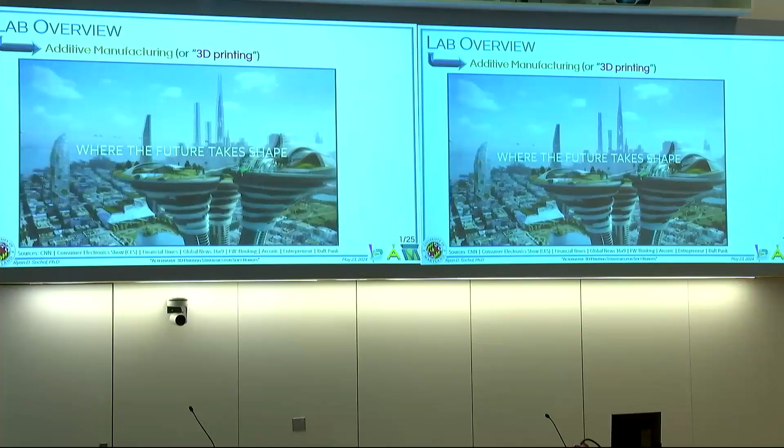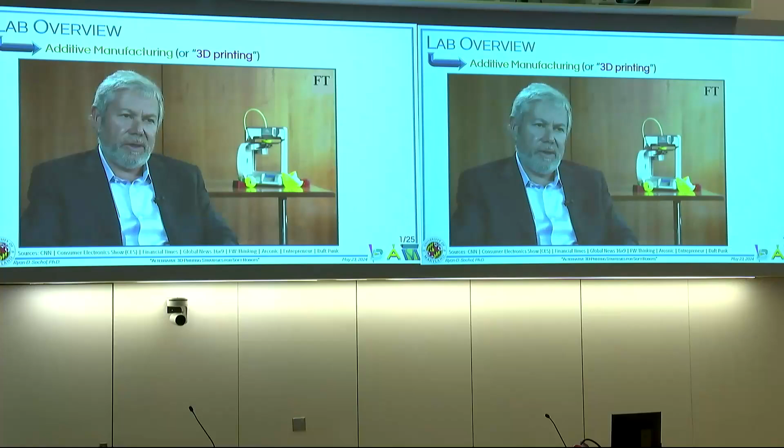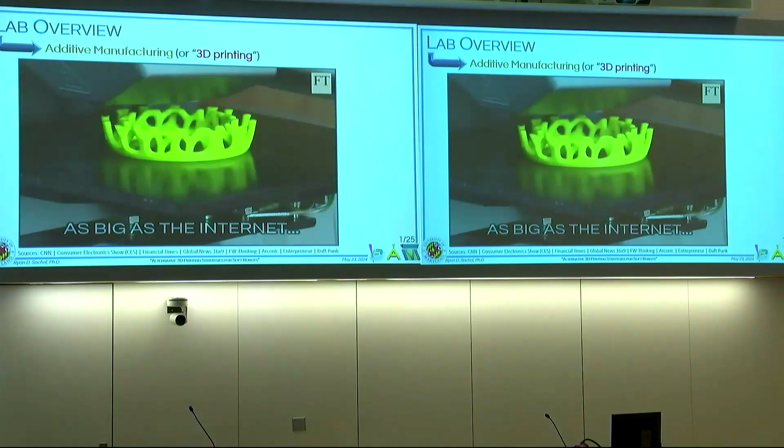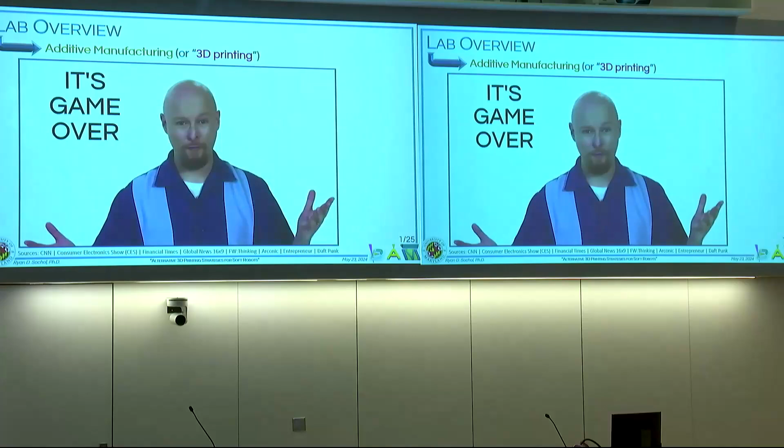At certain science fiction depictions of what the future is going to look like with 3D printing, all of a sudden these things become reality. It's all possible. It's the world of 3D printing, and it's going to change everything. As big as the steam engine was in its day, we're talking limitless customization, as big as the computer was in its day, as big as the internet was in its day. Printer in every person's home 3 years down the line or 5 years down. Common in people's homes as the toaster oven. You print one printer that prints another printer, and it's game over. So what would you build if you could create anything? Print any object you can imagine and have it in your hands in just a matter of hours. It's going to change everything.

All right. So I see some of you are very polite and you've held in your smiles, which you don't need to do here with me. I saw some over here could not hold it in. I don't mind that. This is ridiculous stuff, right?

Anyone know why these people are saying stuff like this? I'll give you a hint. It's because they want you to invest in their companies. So the one person who was saying, oh, it's bigger than the internet was in its day, which makes no sense, I thought the internet was still in its day. But he was the CEO of 3D Systems. These were taken back around the 2010 to 2012 time point.

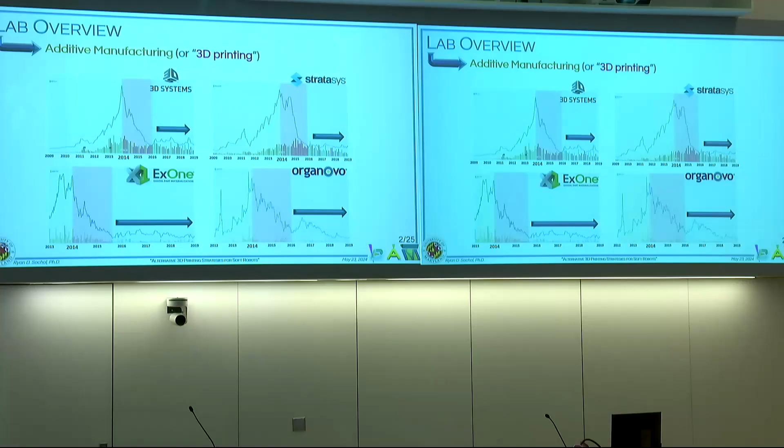And what you'll see is that a lot of this bullshit kind of worked, right? So people threw their money down, they invested in these 3D printing stocks, but at some point publicly traded companies have to release their revenues, their profits, and so forth. And we had this kind of wild crash that happened around 2014 for 3D printing companies, and it really kind of never recovered. And so some people will say, Doc Sochol, this happened a long time ago. We've learned our lesson. And I will say, no, we did not.

So Desktop Metal is another one. This came to market a couple years ago. Everyone said, oh, Desktop Metal, it's got these people from MIT, da da da. Everyone threw their money down, stock went up over 30. I sounded like a crazy person because I was telling everyone I could, like, what is happening? I don't understand. Finally, the world was right.

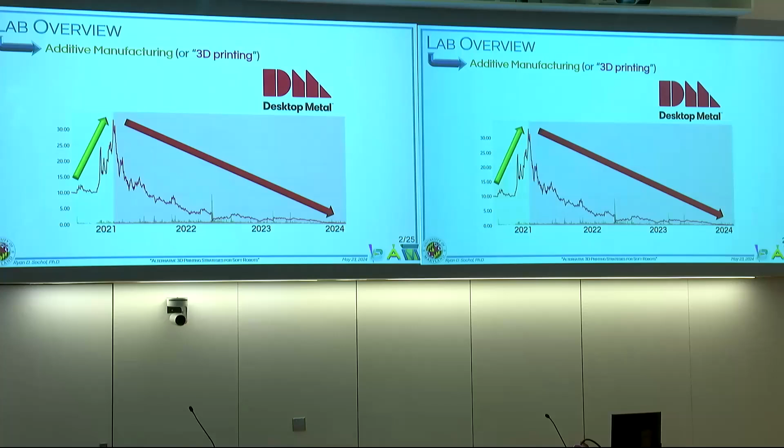Their stock crashed, and it's not just that it hasn't recovered. This particular company actually has been threatened with being delisted from the New York Stock Exchange because their stock has been under $1 for so long, which I hope comes to fruition. It will be vindication for me. I spent a good 6 months of my life thinking there was something wrong with the world.

Anyways, so what is the reason for this? I think this comes down to people not understanding what types of applications demand the use of 3D printing and which ones really make no sense to use 3D printing. So there are two general rules of thumb that we use in my lab. One is in terms of the number of parts that one is making.

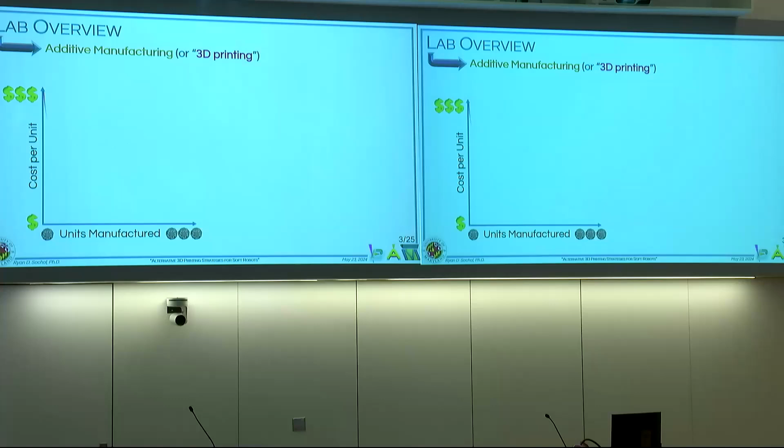So the benefit of conventional methods of manufacturing is that normally the more that you make of something, if you make 20,000, or let's say 20 million of something, that's going to be a whole lot less than just making 2 of something in terms of cost per part. But additive doesn't really have these kind of benefits of scale. Overall, the general costs should have a similar structure where you're just paying for materials, time, and so forth. And so basically, there's this volume break even, which is if you're making a lot of something, use conventional, right?

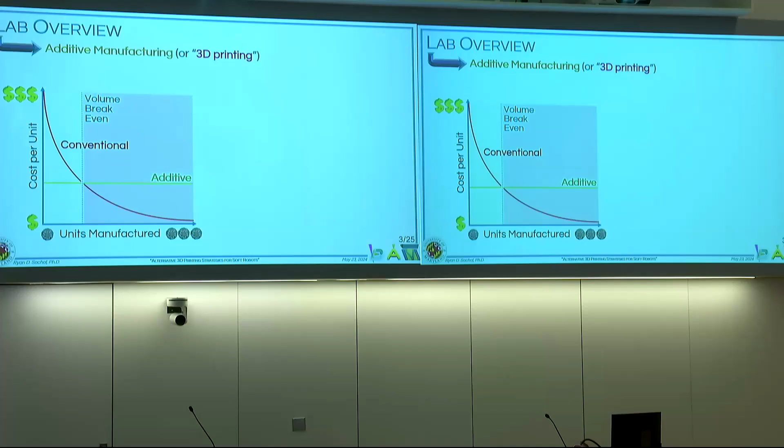If you hear someone talking about, we're going to make 100 million parts with this additive technology, I want you to put on your critical thinking cap and say, Dr. Sochol doesn't agree with that, and he's going to be mad. All right. But if you're saying I only need a few of these, that's when additive starts to really make sense, right? That's why it got into rapid prototyping. If you're looking for a killer app to talk about with your friends at a cool party, I would say Invisalign is a really great example.

So this is a use case where basically your mouth is different from my mouth. And if I'm using Invisalign, in theory, my mouth should be changing month to month to month. And so this is where you need a lot of customizations, a lot of single parts. And this has been a very successful company.

I would say aerospace is probably another opportunity where maybe you're only making a handful of rockets. You're not making tens of millions of the same rocket. At least we aren't yet. And so that's another kind of killer app of 3D printing.

But the one that I'm more interested in is something that's a little bit more qualitative or abstract, which is design or geometric complexity. Typically, the more complex a part design is, and I know that that is a subjective term, the more it's going to cost to make it using conventional means. But with additive, really, you shouldn't have anything like that. Again, it just comes down to the materials and the time on the machine. So it should stay relatively the same.

And so here we have what I'm referring to as complexity break even. Basically, if you have simple parts, and again, simple is very loose, that's a case where it makes sense to use conventional methods. But the more sophisticated something is, those are cases that really demand additive.

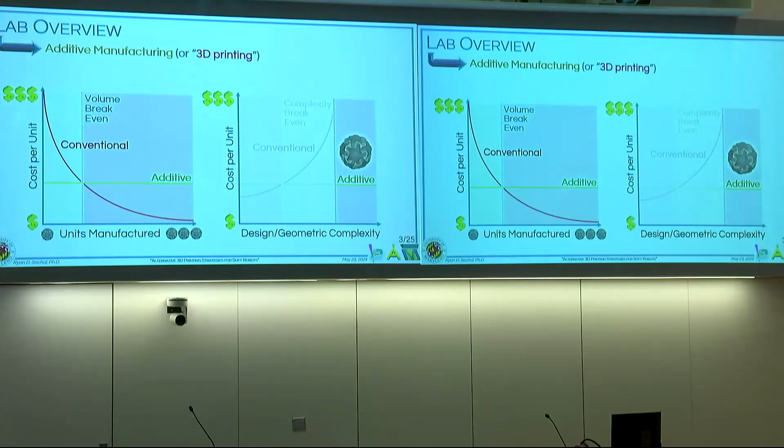And for me in particular, I'm excited about things that you really cannot make using conventional means. That's this regime over here where there just is no way that I know of to manufacture certain types of components. And so that's where our lab typically operates.

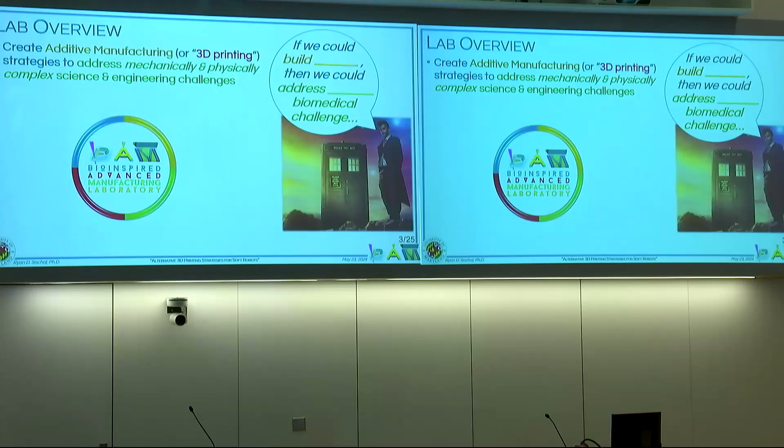I would say that most of the projects we have look something like this, where some doctor comes to us and says, hey, if only we could build blank, then we'd be able to solve some type of biomedical challenge. And so that's led us to do work in a number of different areas. Obviously, today it's a robotics discussion, so we're going to focus on our work in soft robotics.

All right, so there's been a little bit of this from the first talk. Thank you for getting into this. All right, so hopefully I don't have to convince you on my own.

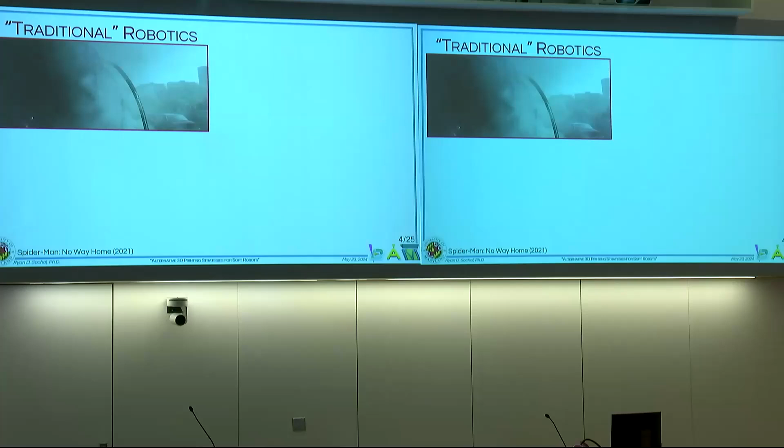Traditional robotics looks something like this, where basically you have these rigid-bodied systems. Often these are controlled using what I would refer to as electronic means. There are other cases, but I think that's the typical standard. But recently, there's been a lot of interest in what's referred to as soft robotics. In these cases, you have soft-bodied systems, and one of the ways that these are actuated is using fluidic means.

Now, when I watched this particular scene from Spider-Man, I thought it was really cool. And I think it does highlight some of the benefits in terms of the ability to adapt in geometry. But I turned to my wife and I was like, this is a terrible use case. And that's because there's actually an intrinsic safety to soft robotic systems. So if you're trying to use a soft robotic actuator to hurt someone, I would say that's a really dumb idea.

So my wife left me and, no, things are fine. And so anyways, all right.

So there's been a lot of interest in the potential of trying to get away from a lot of off-chip controls to getting more onboard intelligence with these kinds of systems. I think our first talk already showed that issue where you have the tubing coming out of these robots.

This particular paper was how I got into the field. It came out back in 2016. It was a seminal work. I think it totally deserved to be in Nature. This was a big one. The thing that I thought was really cool about this is that they took a microfluidic chip and embedded it inside of this Octobot to basically control what's happening in the robot.

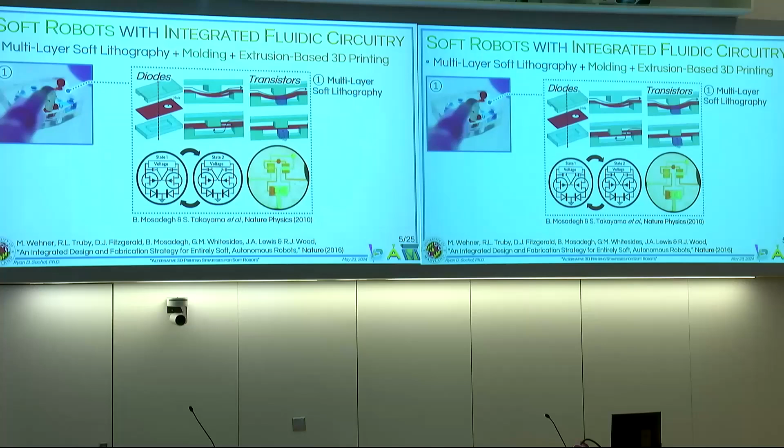So first you start with multi-layer soft lithography. I don't know if any of you have done that kind of stuff in the clean room before. Me, I hate it. I'm not a fan. So they use it. It's actually even a more sophisticated version of that because you have to punch holes in the membrane and align the membrane and so forth.

Anyway, so they take this process, then they put them inside of these CNC'd molds. They actually also have a kind of softer material in there already. And so they're actually doing a double casting process where they have another silicone mixture that they're adding. They're doing degassing, all that kind of stuff. And then they're actually using 3D printing in this case for a pretty interesting concept.

And so what they're doing here, let's see if this can click. There we go. So basically, they are printing a sacrificial material. And they're using this in order to connect that circuit to the different arms, they're patterning bladders and all that. And then actually to get it to come out, you have to wait roughly 5 days for it to evaporate out of this device. So this is a pretty rough process.

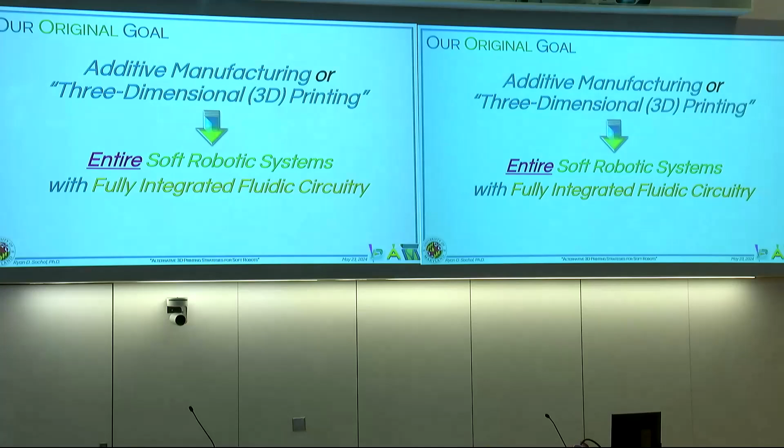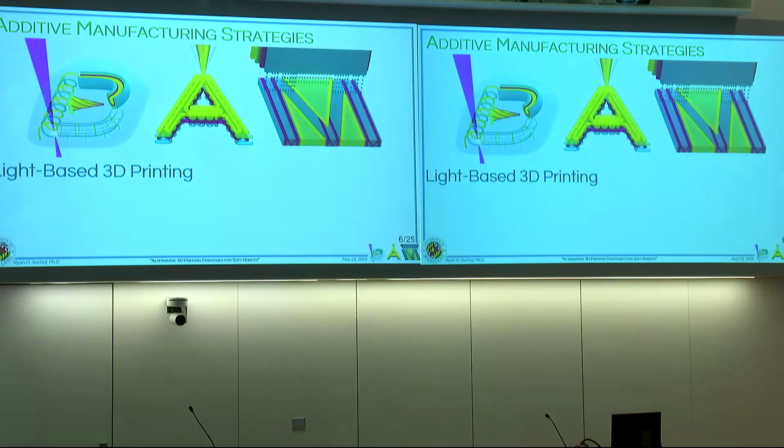And so our original goal was basically, can we use additive manufacturing or 3D printing to print entire soft robots with fully integrated fluidic circuitry in a single print run? So there are a couple options for that. This is my lab's logo. It's meant to represent the 3 most suitable approaches for this type of application. There are light-based 3D printing techniques, extrusion-based 3D printing techniques, and then also inkjet approaches.

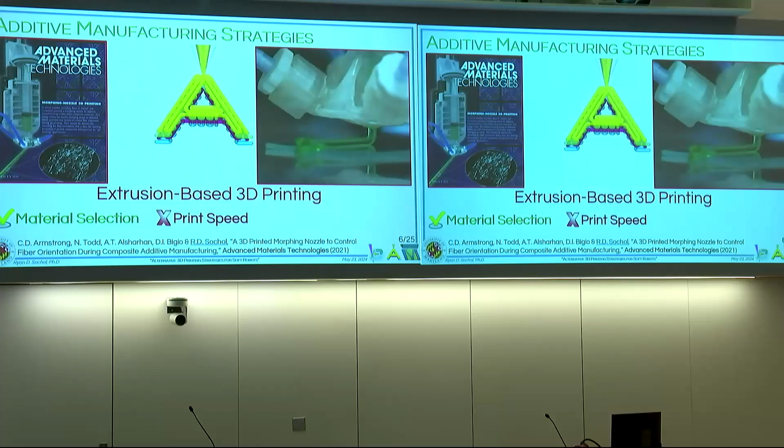I think most people, when they hear 3D printing, are probably thinking about something like this. And indeed, this is something that my lab has done a little bit of work in. I would say the major benefit is material selection. Of everything I'm talking about today, it's not even comparable. If you want material versatility, this is your approach, hands down. For me, the benefits kind of stop there. This is easily the slowest approach that we've ever used in my lab, by far. And also, especially at smaller scales, there's a limit in terms of geometric versatility, the types of designs that you can build, because the nozzle has to physically be there point by point to put down material.

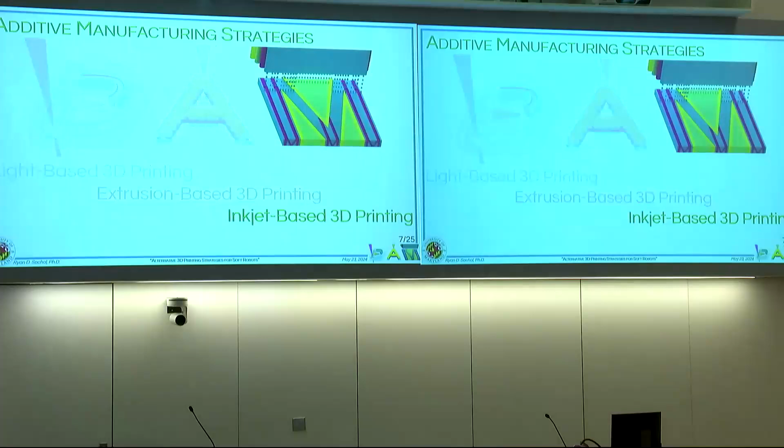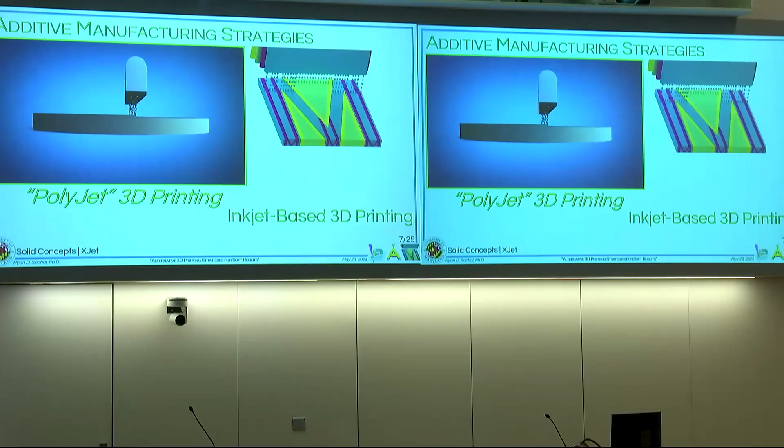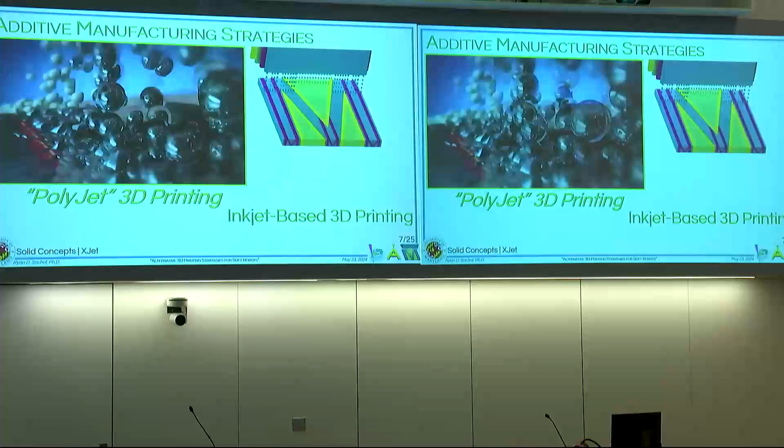And so another option is what's referred to as material jetting. In our case, we're using PolyJet 3D printing, which is a trademark term. This works a lot like a color printer, where instead of printing just one page, we're printing page on top of page. And just like a color printer where you can combine different colors, here you can combine different materials. So you can have hard materials and soft materials. You can also have support materials that help the part to build. But after you're done, you can dissolve those materials away and be left with your final part.

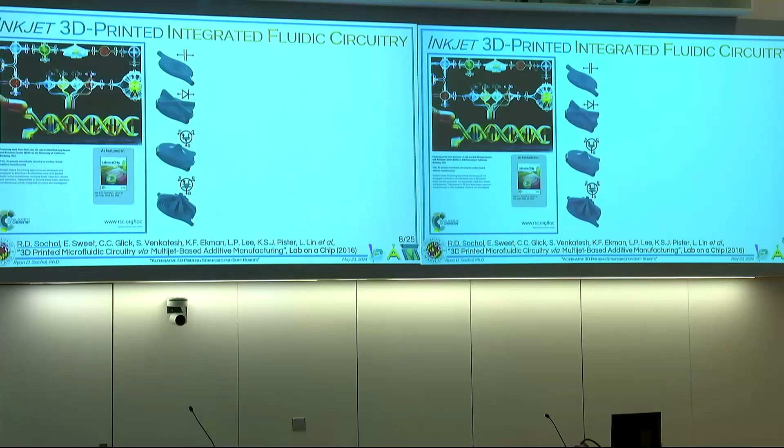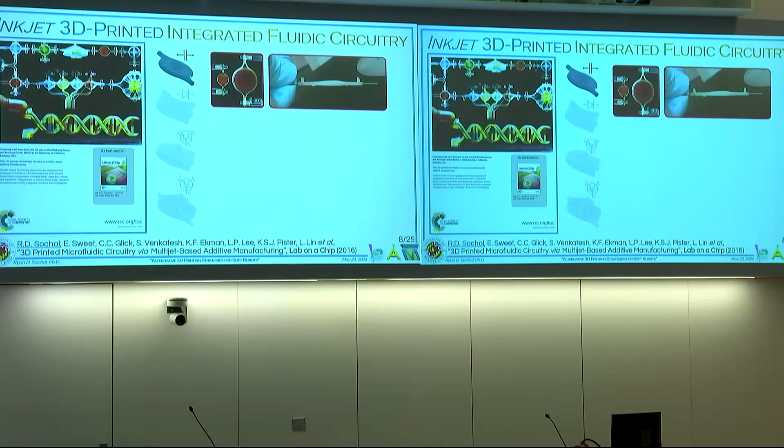As a postdoc, I'd actually applied this technique, and we had demonstrated a number of different types of fluidic circuit elements. There are fluidic capacitors, which are basically like balloons that inflate. There are fluidic diodes, which are kind of like check valves, where just one single direction is allowed, but the reverse direction is not. And then we have what we're loosely calling fluidic transistors, but these are really biased in the triode region. So don't think you're going to get any saturation behavior.

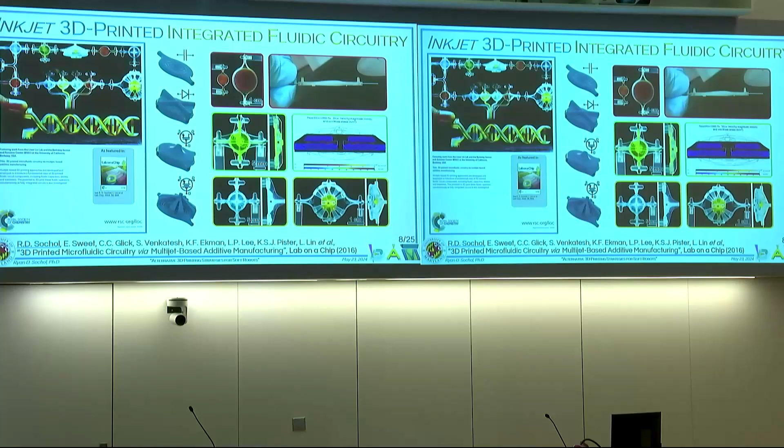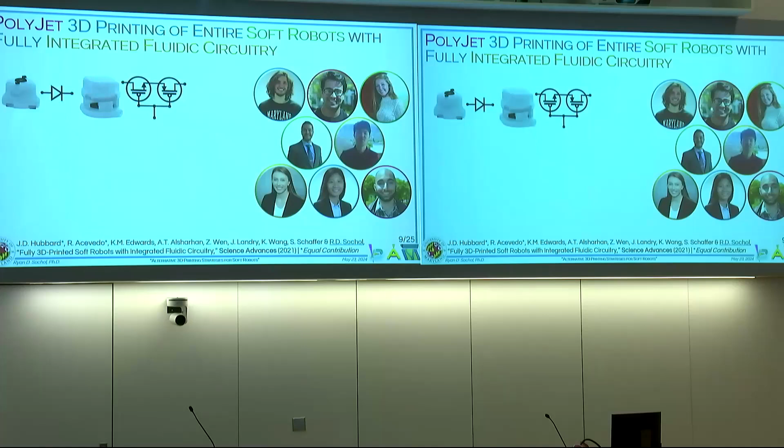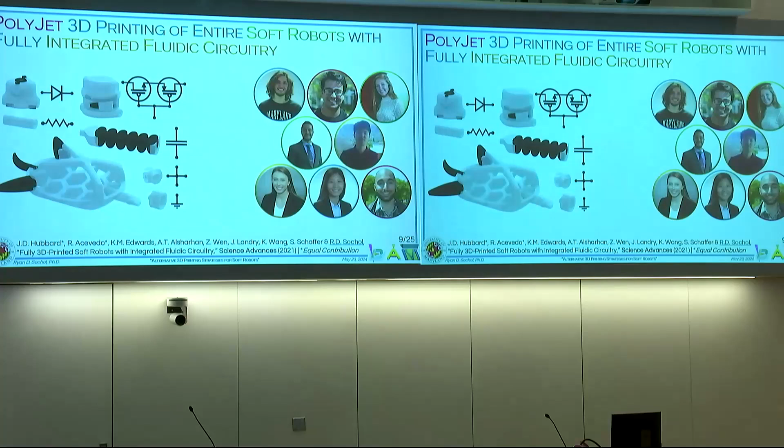And so this is something that a number of students from my group ended up trying to put together. The idea they came up with was, we're going to take designs for fluidic diodes, fluidic transistors, fluidic resistors, which you typically don't want, but that's just a channel. We have the actuators behave like fluidic capacitors. We have different types of joining elements, and then the body features. Then you combine these all inside of your CAD software. For us, we're using SolidWorks. We put it all together. You send the STL file that has that fluidic circuit inside over to the printer.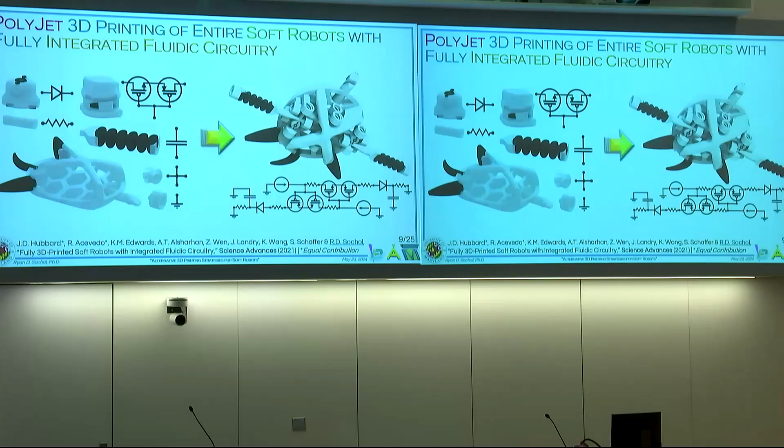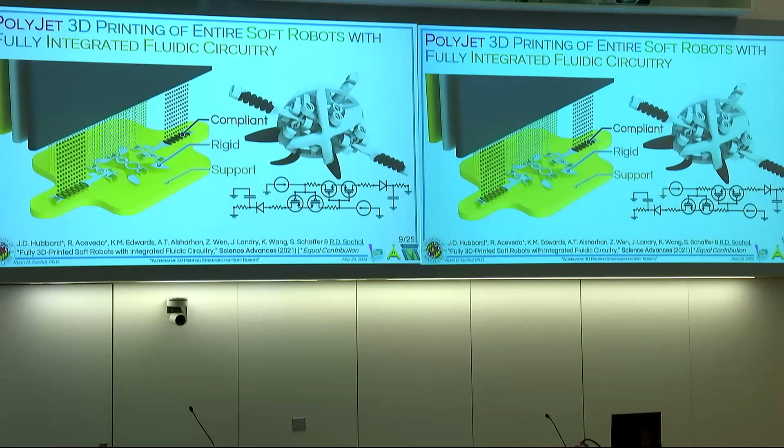And then there we go. It's going to print it. And again, you can have compliant materials that are connected to rigid materials. Then you have that sacrificial support material. And so this is what the process looks like. If you want, you can go see this printer. It's on the second floor, right behind us.

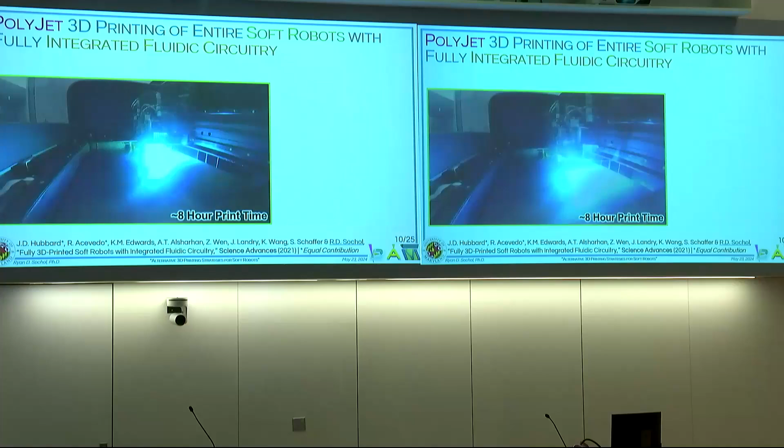Basically, for the printing process, the thing to note is the taller something is, the more time. So this was pretty tall because I thought it'd be cute to have this big shell, but that shell ended up adding a ton of time to our printing process. But it looked cool, and I was trying to make it look like Testudo. I did it. I'm a terrible artist.

Anyways, so you can dissolve the support material, and then basically in less than 24 hours from pressing print upstairs, you actually have this, and there's roughly 1 hour of manual labor that's needed to remove that support material. You're left with a soft robot that's ready to use.

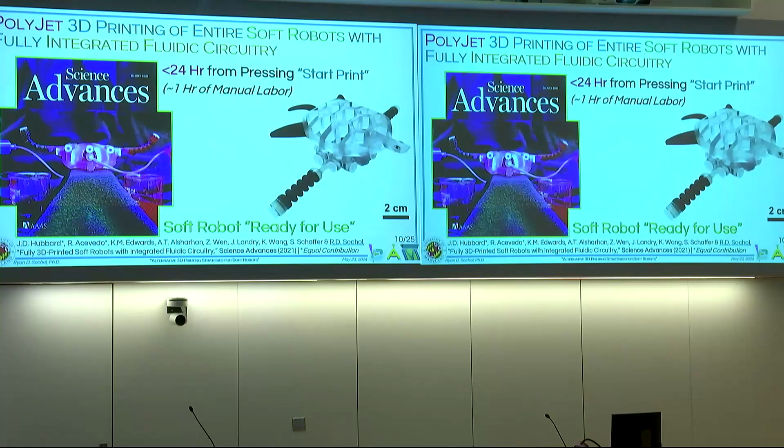And so there was another demo that we did here that was kind of fun. I can't go into too much detail in terms of time, but basically the idea is that we had fluidic transistors that activate at different pressures. And so you can basically control these 4 different states using just 2 different pressures, and only one of those pressures is going to be regulated.

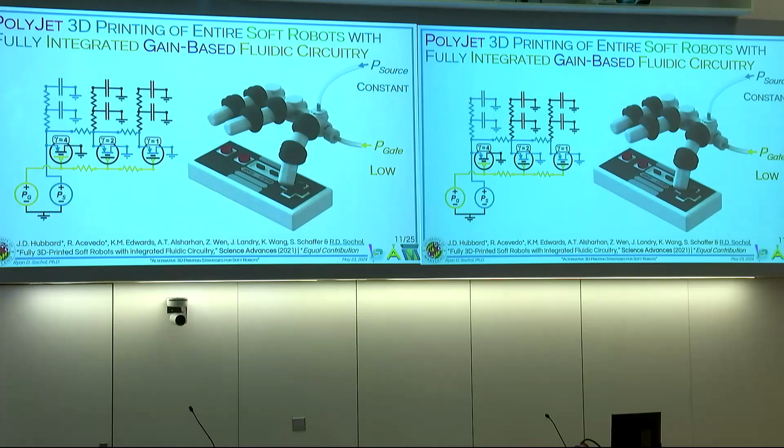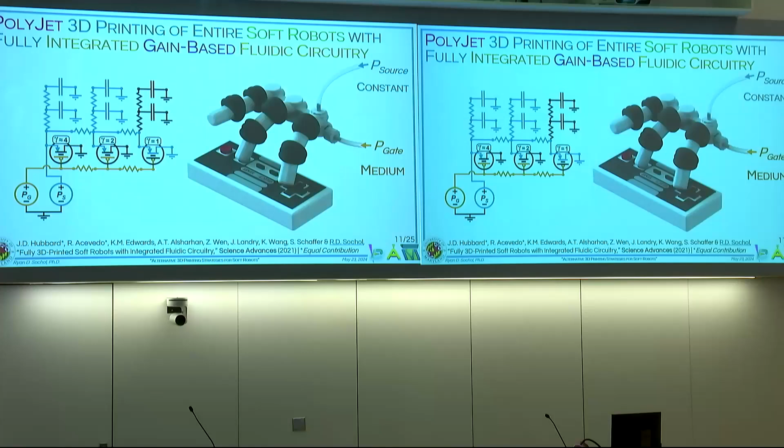So the way it works is that initially, if the gate pressure is off and there's a constant source pressure, nothing happens. But if you increase the gate pressure to a low pressure, it's enough to activate that first transistor, but not the other one. So the finger's pressed down. If you're playing Super Mario, he walks forward. If you increase it a little bit further, that's enough to get that second one to come down. Now he starts running. And then if you hit a high pressure, Mario will jump.

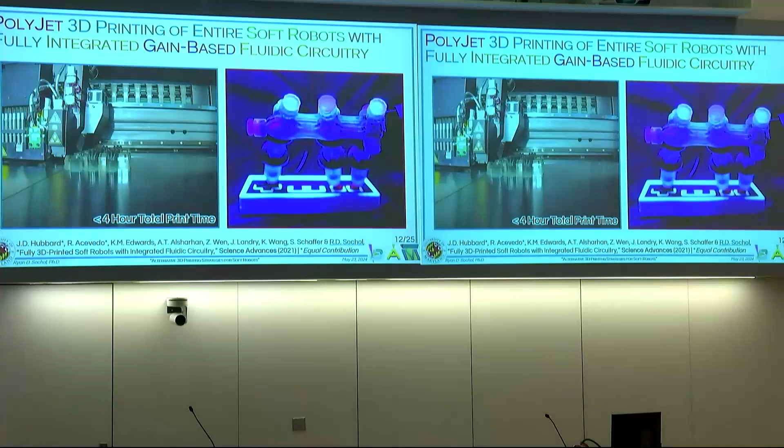So again, the height is really what changes how much time it's going to take to print. I'm loosely saying less than 4 hours. Really, it's about 3 hours, but writing 3.1 hours looks ridiculous. And so this was pretty fast and post-processing was fine. And then you can take some cool pictures with black light if you're a dork like me.

So this is the setup that we have. Basically, we have our source pressure that's coming in. Again, that's programmed to be constant, and this is all pre-programmed. Then we have a gate pressure, and that's going to be regulated from off to low to medium to high, depending on what we want Mario to do. And then that's going to activate this particular controller to control what happens to Mario.

And so I've presented this before. There's some fun music. If you really want to watch the whole thing, go watch it on my YouTube channel or something like that. But I think just here, it's just fun to show the example demonstration.

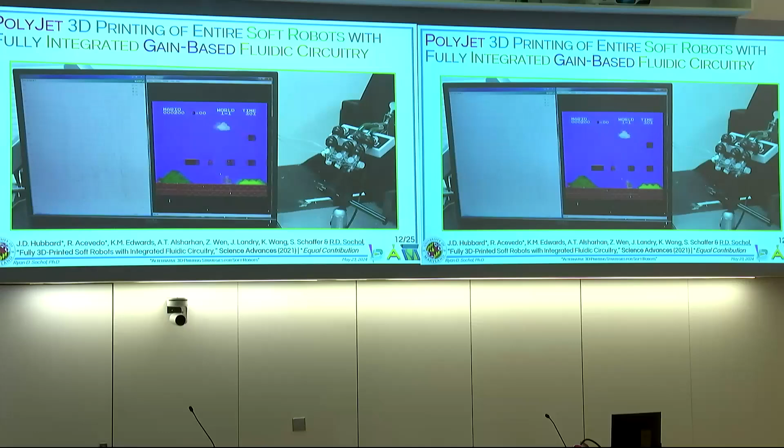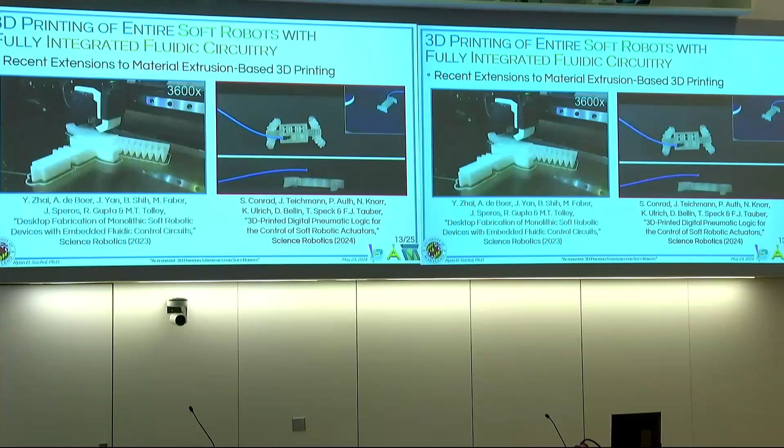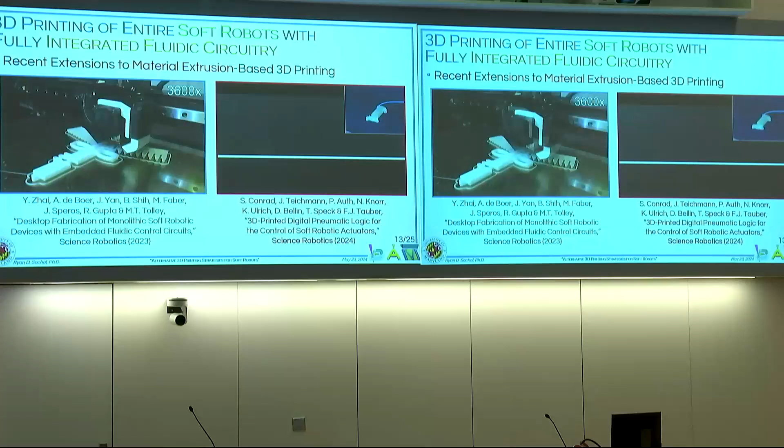But after this, there has been this emergence of other researchers in the soft robotics space really trying to extend this approach to different types of additive approaches. And so one example is the idea of using material extrusion, those extrusion-based methods, to print these complete soft robots that have that fluidic circuitry integrated. You can see the top right, they even step on it, and then it's able to keep walking. There is some limitation in terms of the geometric capabilities. So you'll see these are all more block-like.

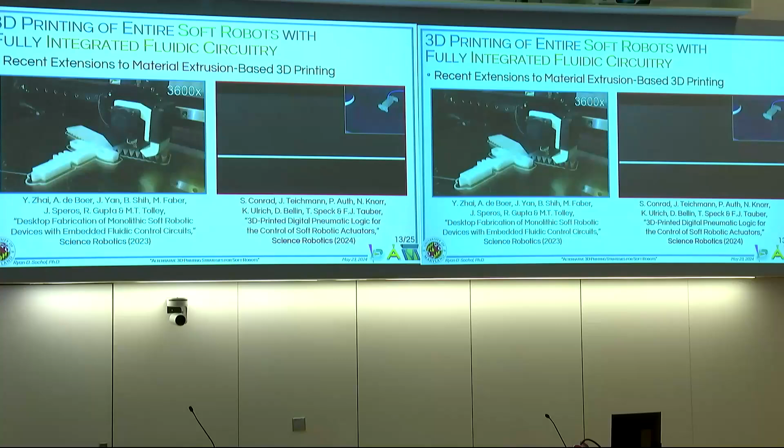And then the second part is I'm not showing how much time this takes, but actually it takes longer to do this than it does for my process in terms of the entire printing process and getting it off, to actually have it working. Although ours obviously takes a little bit more manual work to do it.

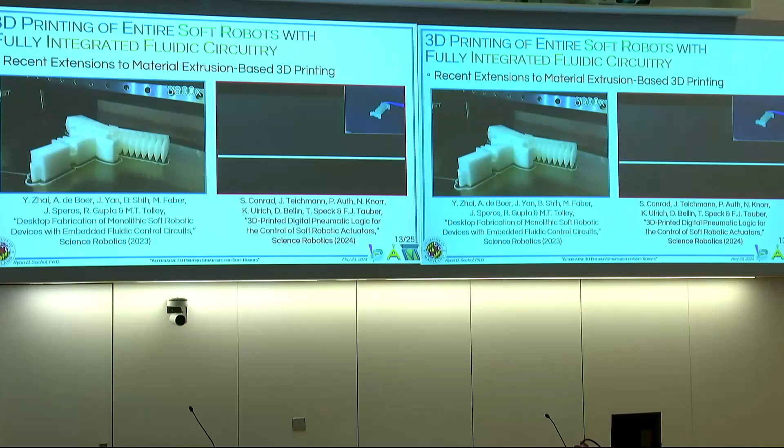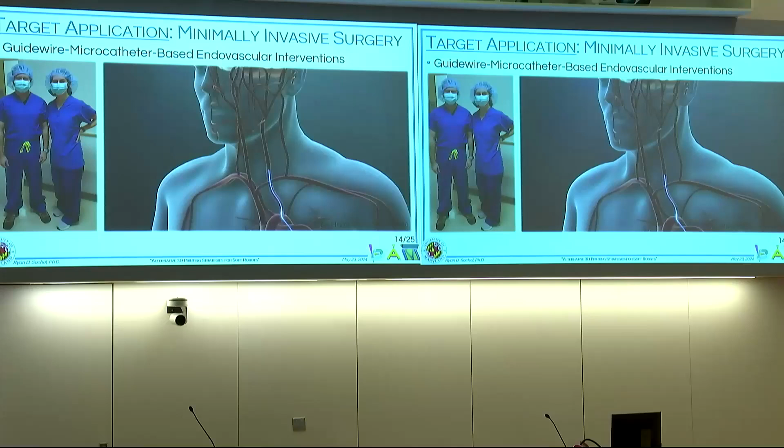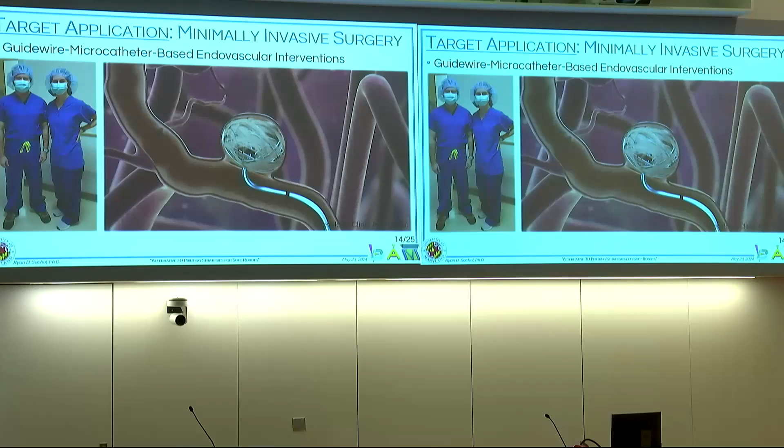And so there were a lot of questions of like, all right, what do you want to do with this technology? And I think that macro scale demo is more for fun, to show the concept that we could have this gait regulation of multiple states. And so right now we're really working on trying to scale this down to make certain types of surgical tools. And these are guide wire microcatheter systems for minimally invasive surgery. And so these are a couple examples.

So this is one of my students, Bailey, and me. We went up to Johns Hopkins, and we got to watch some of these procedures. And so this is an example where this person was actually shot like 7 or 8 times. This is Baltimore. And he's fine, but he had some bleeding in his kidney. Somehow he's fine, actually, which is weird. But he was totally okay, except he had some bleeding in his kidneys. So they're delivering coils to stop the bleeding.

This is another use case. This is someone who has liver tumors. And the idea is instead of just dosing your whole body with chemotherapy, which is not great for you, to really just go straight to the tumor itself and actually feed the chemotherapy directly into the vasculature that leads into the liver. So that's another application for this. And so there's a number of procedures that do this, but in general, there's some consistent challenges.

And one of them is in terms of maneuverability. This is the kind of vasculature that you're in, but realistically, just navigating this is a genuine challenge. And there's this guide wire that they put in, and the idea is you get the guide wire to where you think you want to go, and then you have this microcatheter you kind of sheath on top of it to get to the right point. Then you take the guide wire out, and then you can release stuff into the body, whether that's coils or chemo or whatever that might be, through the microcatheter itself.

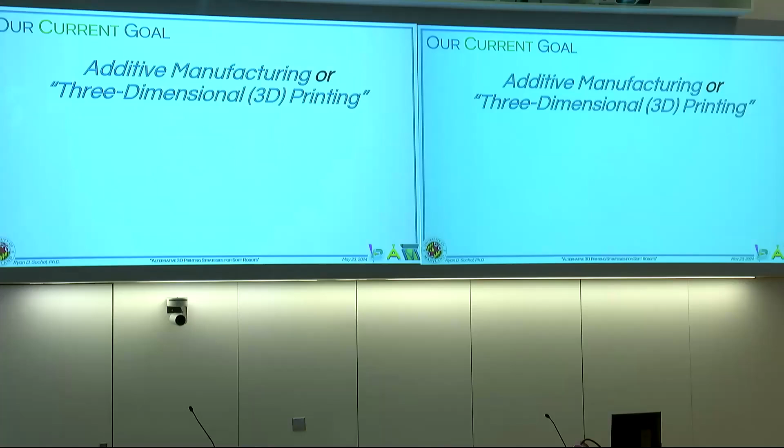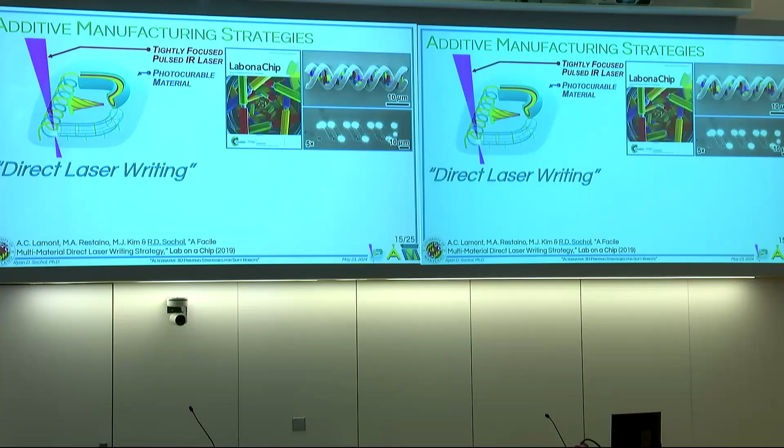So our current goal basically is to use 3D printing to try to make soft micro robotic surgical instruments that have that integrated microfluidic circuitry, but then they also can be printed in a single print run. And so for this, we're using a light-based approach, and this is called direct laser writing. The way that this works is that you have a tightly focused pulsed laser, and you're scanning it inside of a photoreactive material. And wherever this single focal point touches, it turns from a liquid to a solid, basically it cross-links chemically. So there are some very fast print speeds.

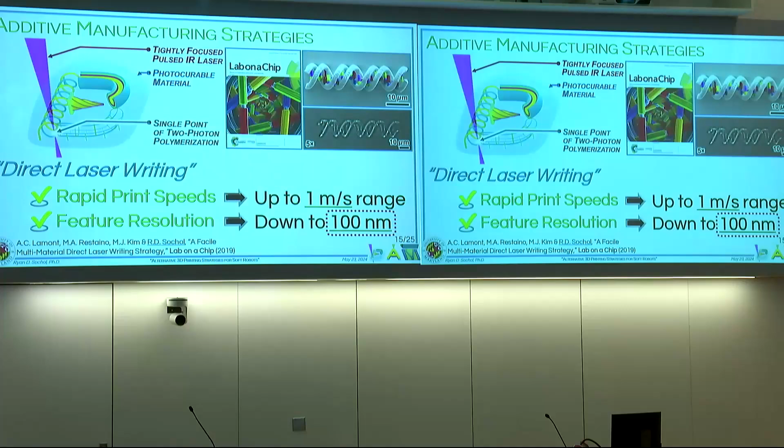The state-of-the-art printers can go well into the 1 meter per second range, despite the fact that they have resolutions down to the 100 nanometer range. So these are really major differences in scale. This 100 nanometer range, though, is a bit of a double-edged sword, because it's hard to make fluidic interfaces that can connect these kinds of components. So initially what we did was take a microfluidic device and print right inside of that microfluidic device. These are examples of microvasculature and things like that. You can also do this with electrically conductive components as well. But for today, I really want to focus on this integration of fluidic actuators and microfluidic circuitry.

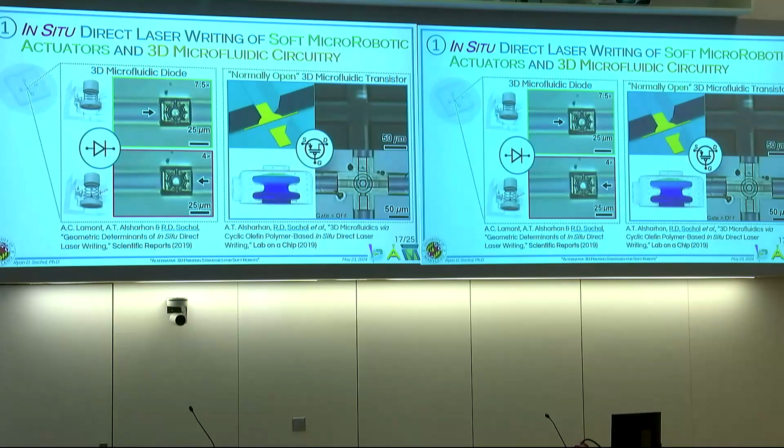And so one of the ideas that we demonstrated was fluidic diodes. We also did fluidic transistors that are kind of like normally open transistors. But I think the one that's hardest to make in this field, if you're interested in getting into it, are what's referred to as normally closed transistors. So these are some of my students who worked on this project.

And the idea here is we have these soft actuators. They are interfaced basically downstream with these normally closed 3D microfluidic transistors. This is the structure of what that fluidic transistor looks like at small scale. And so for reference, the height of this channel is 50 microns, so let's say roughly half of the thickness of a human hair.

And so we have this free-floating disk, which you're able to accomplish because you can print so quickly. Then we have this bellowed microstructure, and then we have this micropost on top. So initially, you have a source pressure that comes in, it closes it, there's no flow. But if you activate a gate pressure of sufficient magnitude, it opens this valve and fluid's able to go through.

And what's cool about this is you can actually change the diameter of the disk, and very small changes in the diameter actually lead to a really big difference in terms of what pressure these will activate to. And so this is what the printing process looks like, obviously sped up for the sake of time. And then this is a false colored SEM that's just showing the soft actuators. And just for a sense of scale, the size of these actuators is roughly the size of a red blood cell, each of those green things.

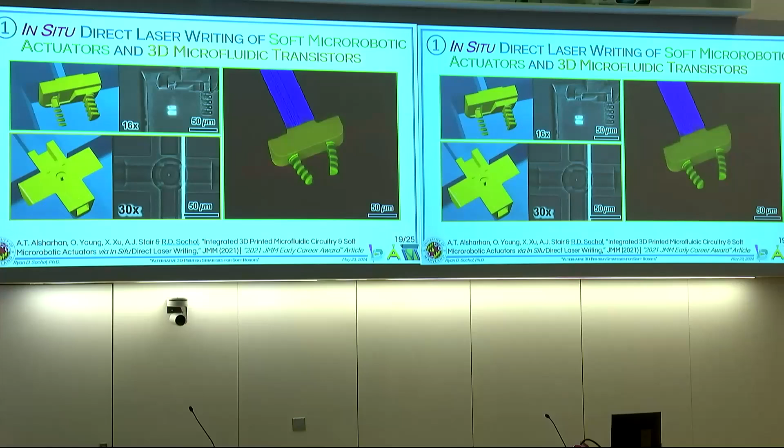So we put it all together and we have something like this. It's very similar to the Mario demo, where basically we have this constant source pressure that's coming in. And again, if you apply a low gate pressure, it's enough to activate that first transistor, but not the second. And now fluid's able to come through and activate that first set of grippers. And then if you do a high pressure, you're able to activate that second set of grippers.

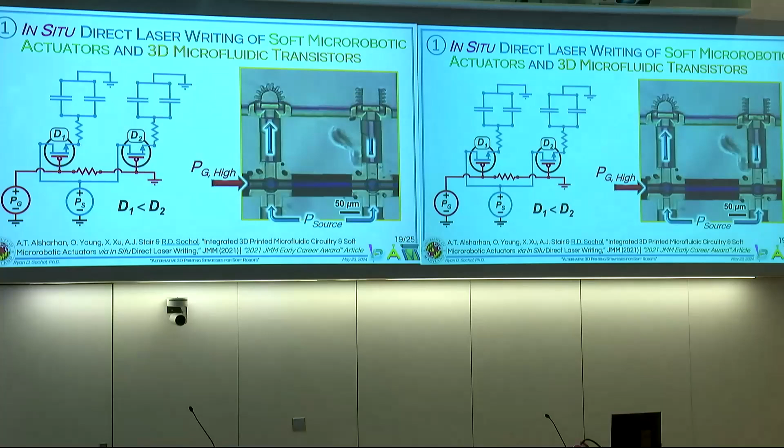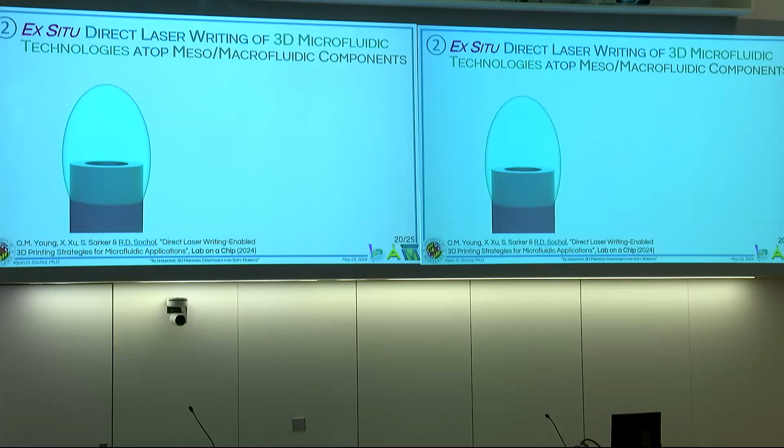So with all of this together, one of the things that we were interested in was being able to apply this not inside of a microfluidic chip, but at the end of different types of microcatheters and things like that. So the idea here is something that we refer to as ex situ direct laser writing, where you're printing on top of something. So you put some photomaterial on top of, let's say, some type of medical tubing or a capillary, whatever that might be.

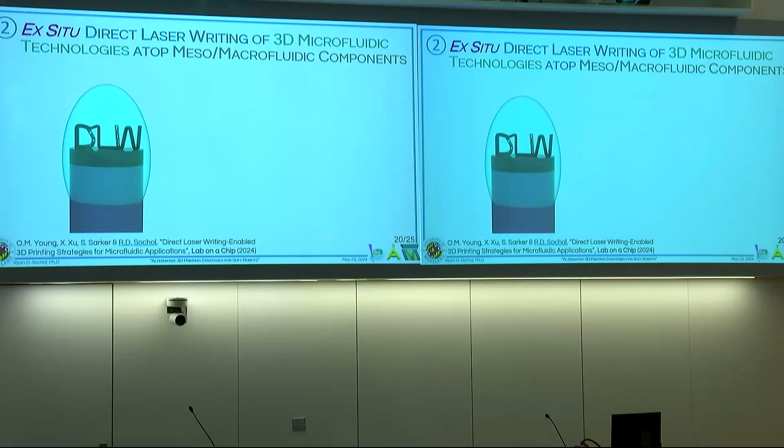And then what we're doing is we're printing right there. And these can have really sophisticated channel architectures, based on whatever it is that you've decided to print, as long as it can satisfy the printing process. You can have really wild stuff like this, it's readily printable. And so my students have been working on this for a number of applications. You're going to hear one right after this talk.

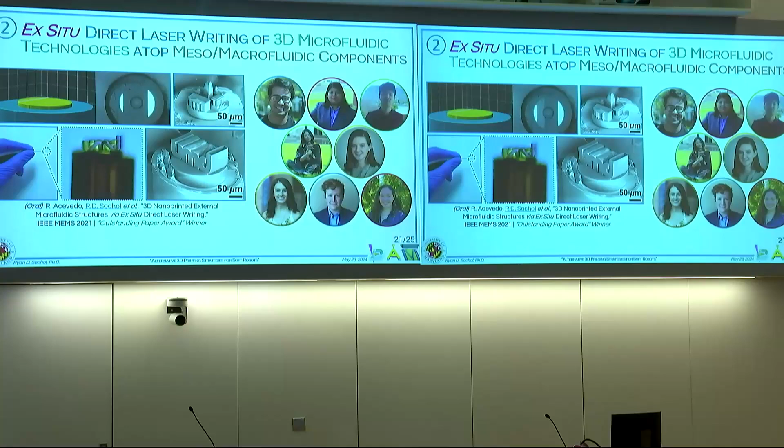But you can see some examples, like up at the top right, you kind of see the scale at which we can produce these types of elements. And this is supposed to be like, hey, we're in the DC region, here are some monuments and stuff like that. And so we've done this for a number of approaches. Again, I'm going to focus only on the soft robotics right now.

And so recently, we were fortunate to receive an NIH R01 to basically try to develop this technology for microcatheters where there's surgery inside. The idea is that basically you can actuate which direction it's going to go in based on that gate pressure. And to be honest, it's relatively new work. So I'm going to just show you exactly where we are, just so you have a sense of where the field is. So these are all recent results. Literally, IEEE RoboSoft was like a month ago.

And so we're showing the ability to make custom medical tubing, right? So getting those 2 lumens and probably an additional one are critical aspects. But getting that repeatedly at small scales is non-trivial. And then these are some example demos of some of the microcatheter components, just showing those omnidirectional movements. And another one I want to bring to your attention is an interesting concept, which is where you can have these multi-segment actuators.

And the idea is that there's certain types of surgery. This one is in collaboration with Children's National and also University of Pittsburgh, where there are certain regions of neonatal hearts that they want to be able to get to. But to do so, you need an S-shaped bending that is really difficult to navigate. But with soft robotics, there's a pathway to do that. So that's another project that we're working on. The other thing I'll mention is we're getting a brand new $600,000 UpNano NanoOne 3D printer that does this type of technology, but everything